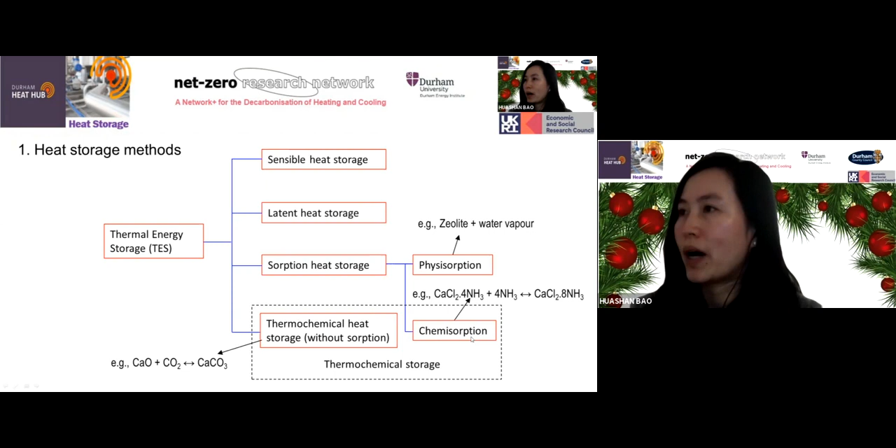So in this example, the size of the chemisorption storage is almost only 1/6 of the size of the hot water tank required. Actually, the salt adsorbent packing density can be further increased, in which case the system volume of the chemisorption storage can be further reduced.

The foundation of the chemisorption process is the interaction between adsorbent and adsorbate. When the adsorbate changes from the adsorbed phase to gas phase, that's endothermic desorption, an energy charging process. When the adsorbate comes into contact with the adsorbent from gas phase to the adsorbed state, that releases a lot of heat - that's exothermic adsorption, an energy discharging process.

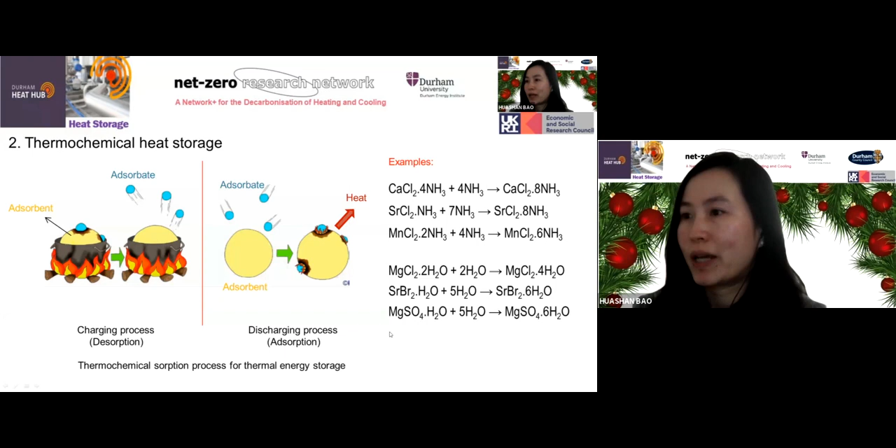That's energy charging and storage. When there's a need for refrigeration, once the valve is open again, evaporation happens spontaneously because of the temperature and pressure difference between the two vessels.

The liquid in the evaporator extracts heat from the surroundings and evaporates, then is absorbed by the SG bed, the adsorbent bed. In this instance, adsorption heat needs to be removed in time, but in some cases, if the temperature of the adsorbent heat is high enough, it can be used for space heating.

If there's a need for upgrading heat, the evaporator is supplied with low temperature heat, and the adsorption heat is generated at high temperature, high pressure in the adsorbent bed, which is the useful high temperature heat output.

A wide temperature range of heat output or cold output can be achieved by selecting the right salt adsorbent, and there are hundreds of options in terms of the salt adsorbent.

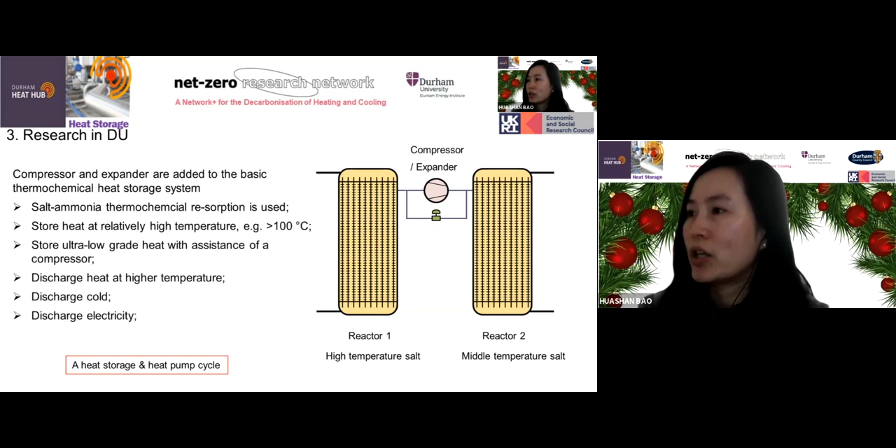In this hybrid cycle, for example, if we use a strontium chloride ammonia working pair, it runs like this: when the heat source temperature is high enough, let's say 110 degrees, it operates the normal sorption energy charging process, and the compressor is bypassed. When only ultra-low-grade heat is available, let's say 60 degrees, it also can be used to drive the desorption process.

However, at the same time, you will need help from the compressor to pressurize the desorbed ammonia so that adsorption can effectively take place in the adsorber.

In this case, the compressor can be powered by renewables like wind turbines or solar PV. So both the ultra-low-grade heat and electricity can be stored in the system for later use.

During the energy discharging process, it can upgrade heat, produce cold, or generate power. If ultra-low-grade heat, say 60 degrees again, is used to drive the chemical reaction in the desorber, ammonia gas is released and it will be absorbed by the adsorber at a higher temperature, like 110 degrees, or even higher if a different high temperature source is used in this adsorber.

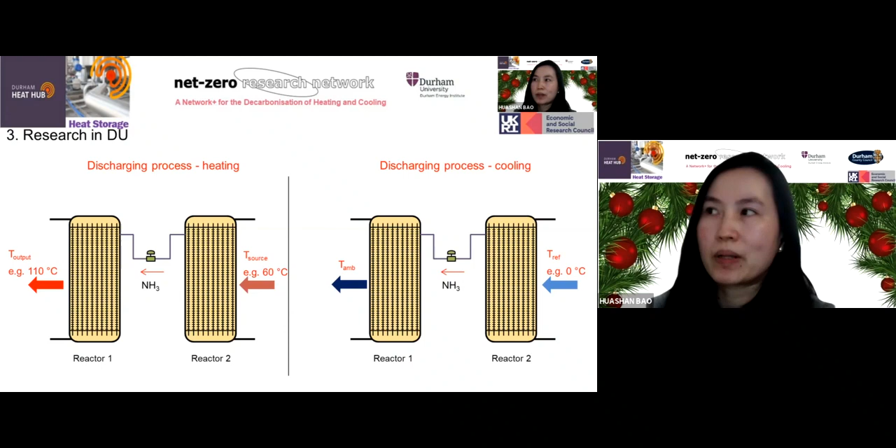If cooling is needed, simply connect two reactors together and the chemical reaction happens spontaneously, as explained earlier. If the ultra-low-grade heat is still used for desorption and makes the high temperature, high pressure ammonia pass through an expander turbine, then electric power can be generated.

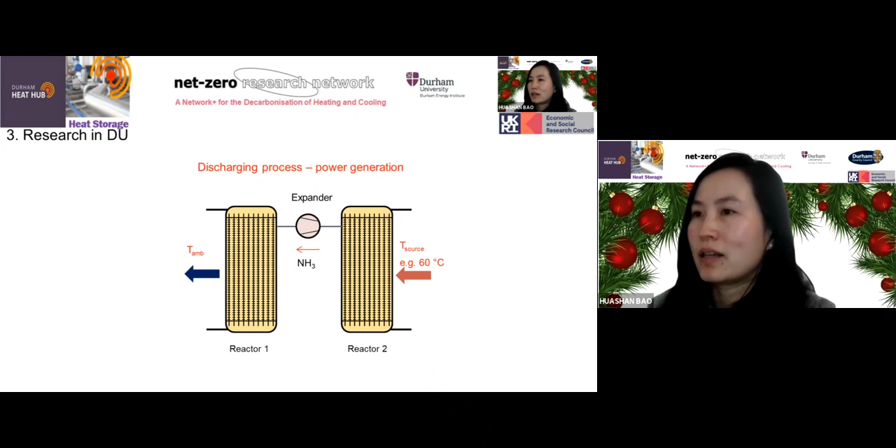If upgraded heat is preferred rather than power generation, the temperature lift can be around 25 degrees and 45 degrees for these two cycles respectively. The manganese chloride sodium bromide cycle has very low round-trip efficiency, but it can achieve around 75 degree temperature lift. The thermal efficiency of upgrading heat is around 0.3 to 0.5, and the thermal efficiency of refrigeration is around 0.6 to 0.75 for refrigeration at 0 degrees. More results, discussion, and detailed analysis can be found in our publications.

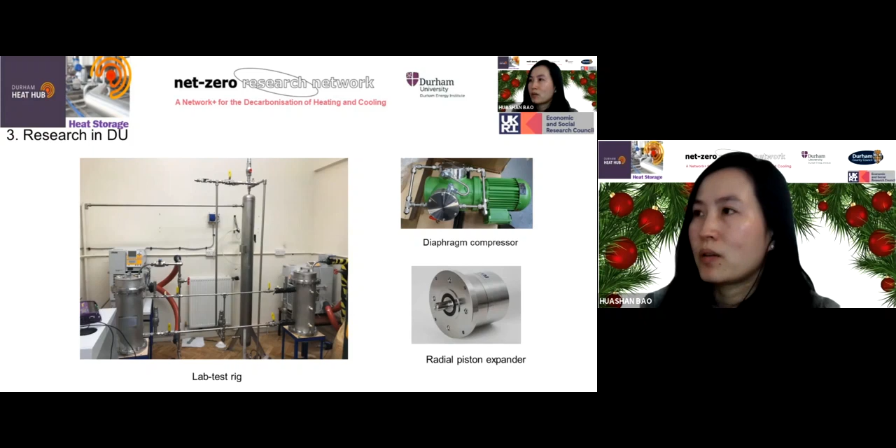This photo is our laboratory test rig for the thermochemical sorption storage system. We have a compressor expander in place to be installed later for comprehensive tests of the hybrid storage system. We also developed a commercial prototype through an Innovate UK project, which is being manufactured at the moment. That's basically what I would like to share with everyone today.

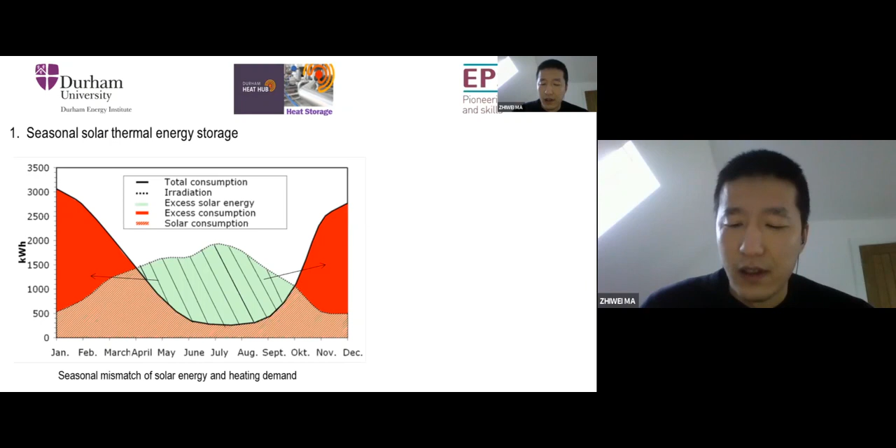I'll show you a table of how much useful heat you can get from a 20 square meter flat plate collector facing south on the roof, assuming a 50-degree inlet water temperature, enough for some heating. I list 8 cities across the UK, shown in the figure. We can have useful heat between 4,200 and 6,500 kilowatt hours. This is almost enough for a typical UK house with 100 square meter floor area and very good insulation.

So the key question is how we can do the storage for long term. Actually, technologies like sensible heat storage, latent heat storage, and thermochemical storage, as Huashan just mentioned, can all do long-term storage. So the key question is the energy density and the volume you need to store the heat - you don't want another house just to store the heat for your house.

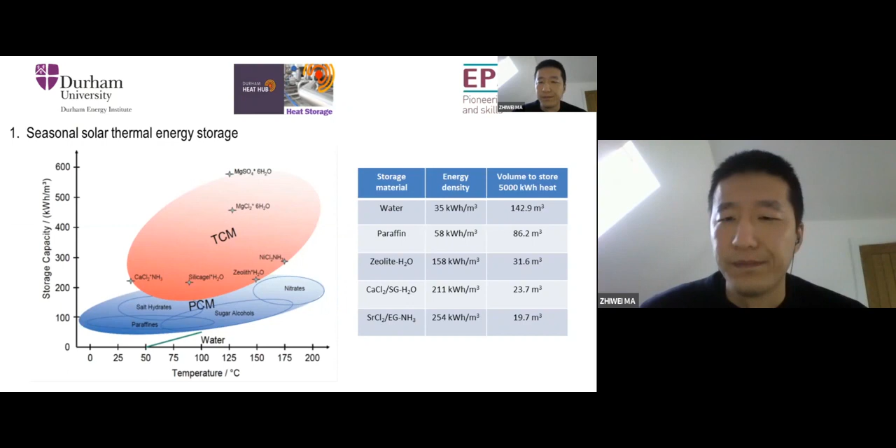And the minimum value we have here is strontium chloride and ammonia, which give you no more than 20 cubic meter storage volume. So that's solar thermal energy storage.

So in the second part is some pilot projects using water as storage material, which was delivered in Germany. I think it's 20 or 25 years ago. They started to do some pilot projects using this concept.

So you can see here in the picture, they built a giant tank with the volume of 5,700 cubic meter. That's one is in Munich in the year of 2007, coupling with 2,900 square meter solar collectors. And this system was served for 24,800 square meter heated area. So that's a kind of a central heating system using this solar collector and storage systems. Due to their calculation, this system can cover 47% of the heating of the whole year using solar heat.

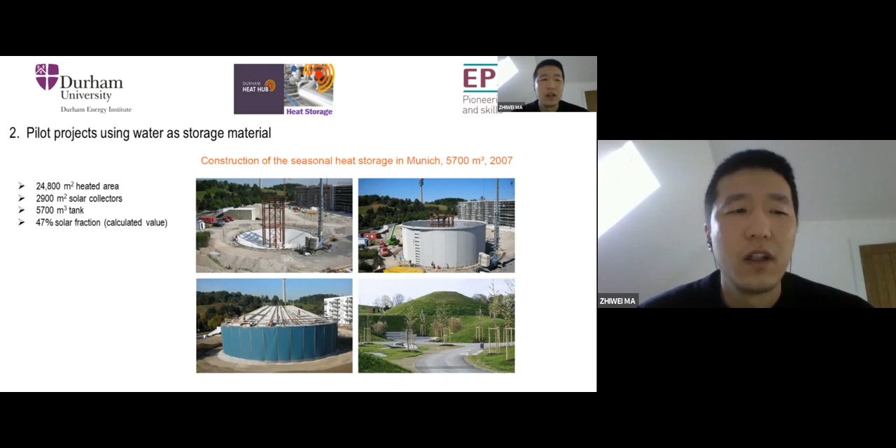Here is some summary of the different projects at different level, different storage volume, using different storage method, like above ground tank, underground pit, and underground borehole and aquifer. You can see the summary here.

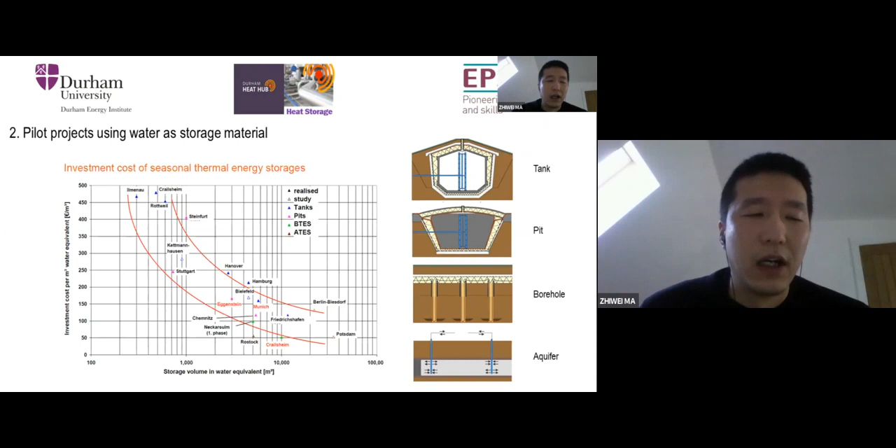This is the cost, the investment cost per cubic meter water storage. Of course, the specific cost reduced with increased volume. And for a 10,000 cubic meter storage volume, you can see the cost is around €100 per cubic meter water storage. That's the summary. I think it's 10 years ago. The cost may change now, but that's the only resource about investment cost I found.

So water sorption storage is a very hot topic in recent years because it has higher energy density and minimum heat loss during the storage, as Huashan just mentioned. So the water sorption actually has two different type systems, closed system and open system. The closed system, you can see here, that's the same configuration as Huashan just mentioned.

We have a reactor here and condenser evaporator here. During the charging process, you give heat to the reactor, and the salt or the sorbent material inside the reactor will desorb the water vapor and then be condensed here. During discharging process, it gives some ambient heat to the evaporator. So the water inside will be evaporated, become vapor, being adsorbed in the reactor, deliver some heating.

Actually, we can use an open system because there are water moisture in the air. So in the charging process, normally we use dry, hot air as the energy carrier, passing through that sorbent to desorb the water moisture from the sorbent, and the air become wet but warm air. That's the charging process. During the discharging process, we use cold but wet air penetrating through the sorbent bed, and water moisture in the air will be adsorbed by the sorbent and deliver some dry and warm air for the heating process.

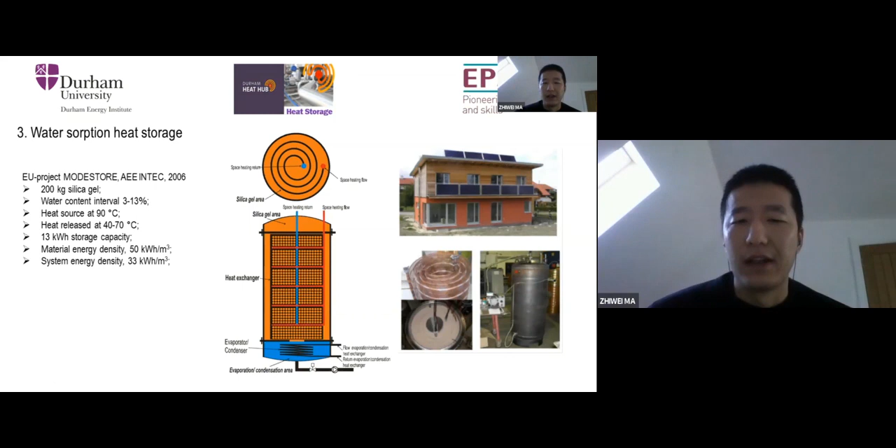Besides the physical sorption process, chemical sorption was also used for water sorption storage, like strontium bromide. In a 2014 example, they used 400 kilograms of strontium bromide. You can see the white salt packed in a tray, with different layers of trays allowing air to blow through the material layer by layer.

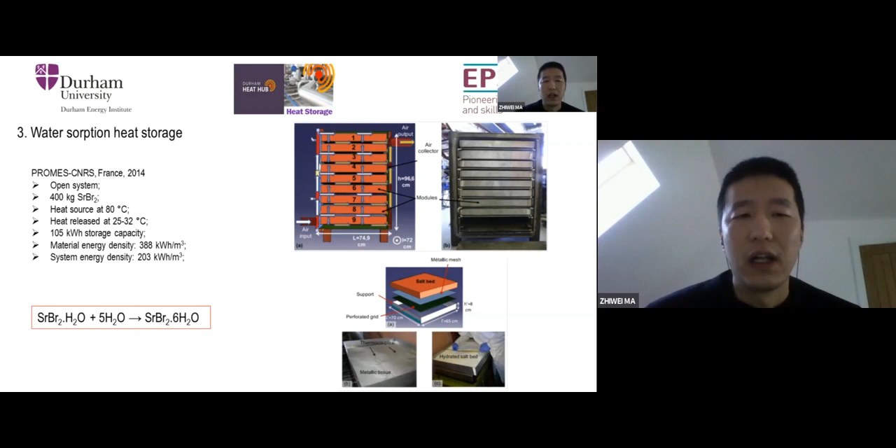So if you use this kind of technology, you need to couple it with some low temperature heating facility, like a fan coil or underfloor heating.

Here's a summary of this kind of water sorption heat storage technology. The horizontal coordinate is desorption temperature, and the vertical coordinate is energy density. You can see a lot of projects use zeolite because it has very stable performance, and the only drawback is that the desorption temperature is very high.

You can also use silica gel, which is cheap and has a desorption temperature of only 80 degrees, but the energy density is low. Chemical sorption materials like strontium bromide, magnesium chloride, and lithium chloride generally have higher energy density, but using salts has other issues - they are generally corrosive and cannot be used under high relative humidity, because the salt will absorb water moisture in the air and become liquid.

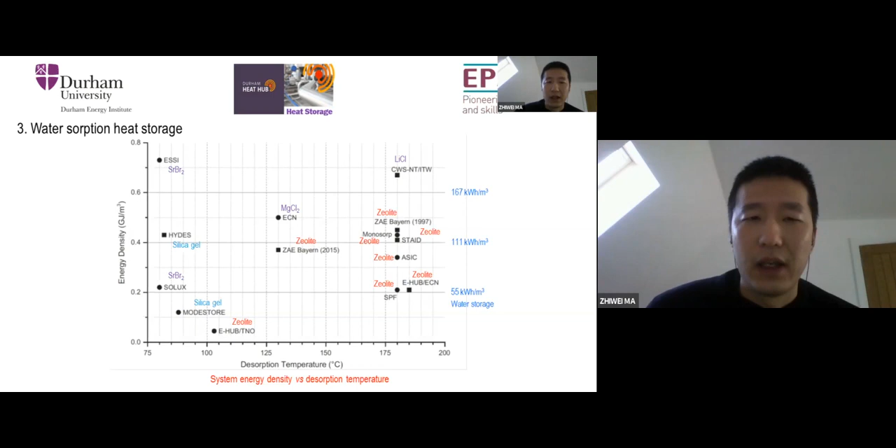So there have been some studies using composite materials to do water sorption. The last section I want to discuss is our group's study using a kind of salt hydrate, sodium acetate trihydrate, short name SAT, to do long-term storage.

SAT at room temperature is a white crystal salt like this. If you heat this salt to 80 degrees, it becomes a transparent liquid, just like water. This material has a very large supercooling degree, which means it needs very low temperature to freeze and get back to solid state. Although the phase change temperature is 58 degrees, it will not turn back to solid until, let's say, minus 10 degrees - that's because it has a very large supercooling degree.

So you can store this material at ambient condition without any insulation for long term. After seasonal storage, the temperature of this liquid drops to ambient temperature, say 5 degrees or 0 degrees, but it is still liquid.

So if you give some activation, like using a cold finger, seeding, or supersonic treatment, you can manually control the solidification process and activate it yourself. I'll show you a GIF here - you press this clicker inside the bag, and it will induce the freezing process. This process releases heat. That's the mechanism behind this storage process.

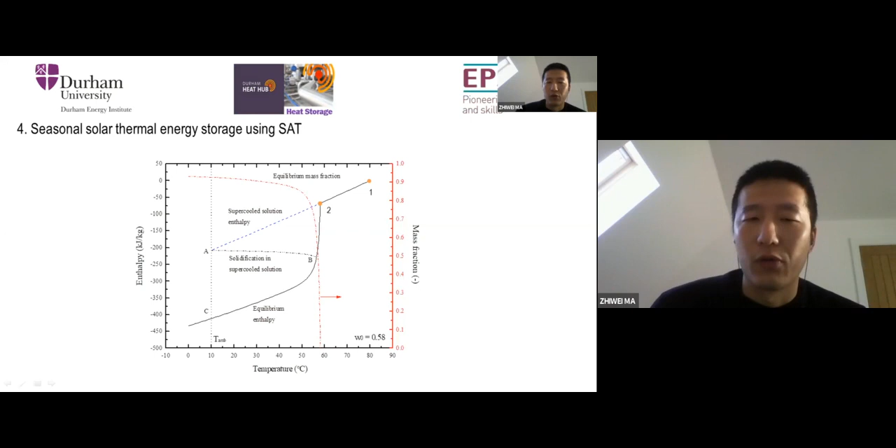So we built a model to simulate this process - a simple single tube model with material stored inside the tube and heat transfer fluid flowing outside the tube, with solidification starting from the top.

If you're using water as the storage material, you will have energy density around 70 kilowatt hours per cubic meter. But if you use SAT material at the end of storage with perfect insulation conditions, you will have 140 kilowatt hours per cubic meter storage density.

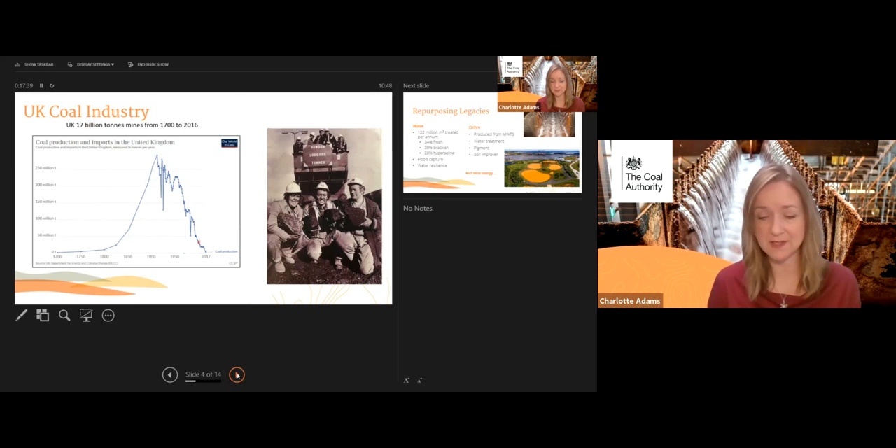Switching from steam to diesel and electric trains, cheaper imports of coal from other countries, the dash for gas - these things ultimately led to the decline of production. And then also you've got on top of that the decarbonisation agenda, with coal very much being phased out of our energy mix, as demonstrated in June when we had two months without coal generation, which was the longest time that had been achieved since 1882.

So we have this legacy of underground shafts and galleries. We have water coming out at surface that we treat, and we produce materials from the treatment of the water. So we're very much trying to repurpose the legacy. In terms of the water, the amount that we treat per annum is equivalent to the daily water demand for about 2 million people over the same period.

And the Environment Agency predict that there will be a shortfall in water within 25 years. So we're exploring whether some of the water that we produce could meet some of that demand.

As part of the treatment systems, you can see in the picture at the bottom, there's this orange coloration there. So that's effectively what's produced in our treatment systems. The biggest thing we deal with is iron, so we get it out of solution by oxidizing it in our treatment systems. And we also have a market for that - it's used as a soil improver and as a pigment.

And also it's very good at absorbing things, so it's used for water treatment as well. So we have markets for our ochre, and we're exploring markets for water. And also what I've talked about previously in some of these meetings, mine energy is something we're looking at.

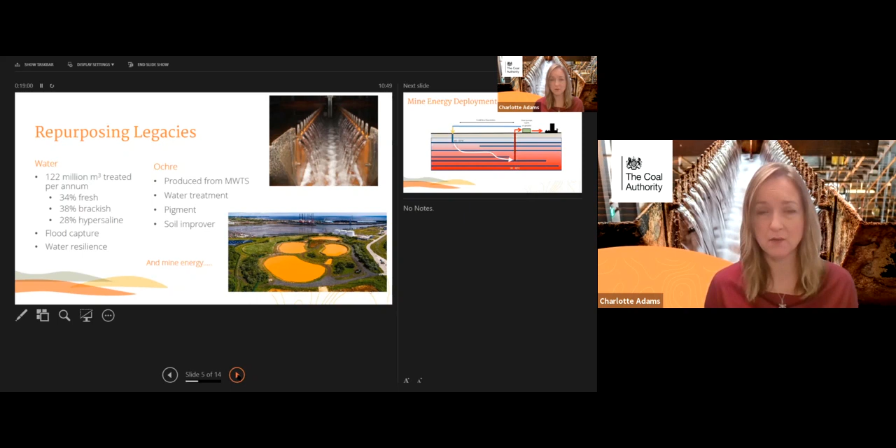Obviously today we're going to be more focused on the storage. So just a brief background of what we are doing with the mine energy. We estimate that there's enough heat in the coal field to heat all of the buildings that overlie it. And the reason that it's attractive to us is obviously we have access to it through the infrastructure that we own.

But we think it's a good source of heat because we don't have any seasonal variation in the source temperature. So if you've got a heat pump system running on a mine energy system, your coefficient of performance will stay constant, unlike an air source heat pump or a surface water source heat pump, where the COP tends to drop when you need the heat most.

And if you compare this to open loop aquifer heat pump systems, which again are similar in that they have a constant source temperature like the mine energy does, the reason mine energy has benefits over that type of system is because the structures that we target underground are large open structures capable of flowing much greater quantities of water. It means you can get away with fewer boreholes to access it.

And we also, because we tend to take the water from one seam and put it back in another, we find that the boreholes can be quite close together on surface sometimes, so that's quite good if you've got a constrained site. And this diagram is a simplification of how it all works in practice.

If we were doing a larger, maybe 2 or 3+ megawatt size scheme, we'd probably have a couple of boreholes for abstracting the water and one for re-injecting it, just to give you a bit more flexibility and resilience on the system. So in terms of storage, we're thinking about the bigger systems.

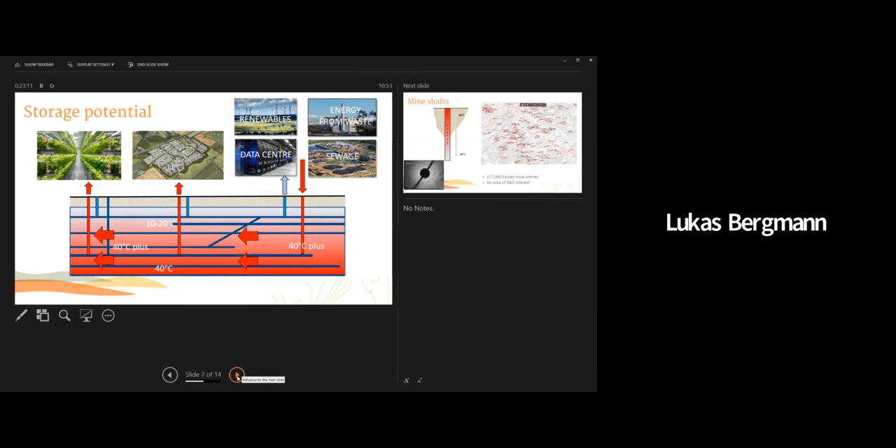And the type of structures that we're looking at, we're looking at both mine shafts and the underground workings as separate opportunities in which we could store heat.

But the thing about them is very often, as part of the colliery abandonment, they're very often filled. So they're not all accessible. So one thing we look at if we're looking at a new site is we look for the shafts, and we've got a database to see whether the shafts are usable or not, because obviously that can save you some drilling costs if you're thinking of a mine energy system, and also for storage, then we need a shaft that's got a good volume of water that we can use to reject heat to.

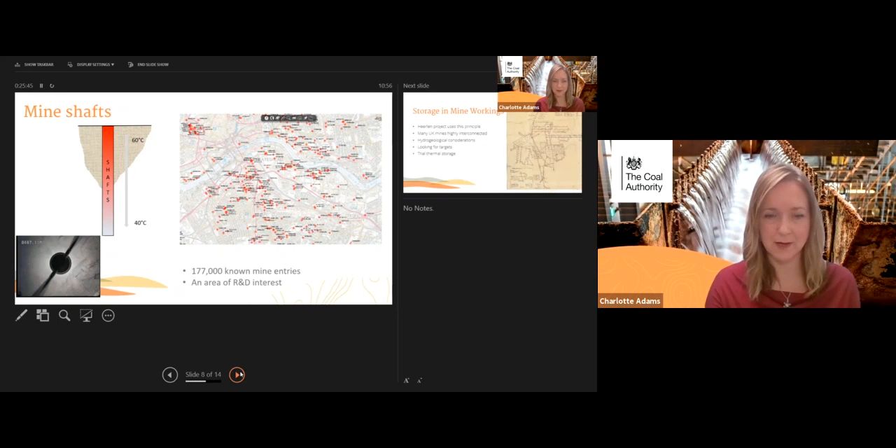A good example of this is the Heerlen project in the Southern Netherlands. There they have a heat network based on the 5G concept, an ambient loop heat network, based on energy exchange. So there's heating and cooling being provided to the buildings there. The idea is there's not massive changes in temperature difference, but in that instance the whole mine is effectively used as a thermal store.

It's quite deep, around 700 meters, and it sits at about 28 degrees. The thing with that is it's not connected extensively to other collieries, so it's effectively a thermal store. That said, the project has been running for about 10 years and has been successful, and they've now got to the point where they need to put other sources in because more loads want to connect to it.

So the Heerlen project is a great example, a little bit different to many of ours, because our mines in the UK are very well connected. That was done so you could control water levels regionally and also access coal over wide areas, so we have a lot of very well connected collieries. We need to look at where we've got these discrete pockets, maybe in smaller collieries, that could be suitable and also align with the location of the heat source we want to put into them.

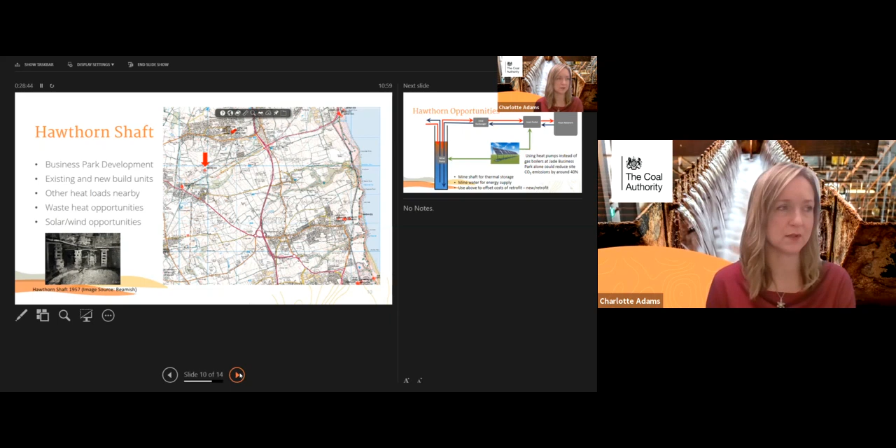So the opportunity here: we've got a shaft that's just under 8 meters in diameter with a 357 meter water column in it, which we've worked out offers a storage opportunity of around 17,500 cubic meters. That's already stratified because this one isn't pumped.

The water here is around 100 meters below surface, because we keep the water levels lower to protect an overlying aquifer. So we need to think about the electricity consumption in lifting water out of the shaft once we've got heated water in there that we might want to use.

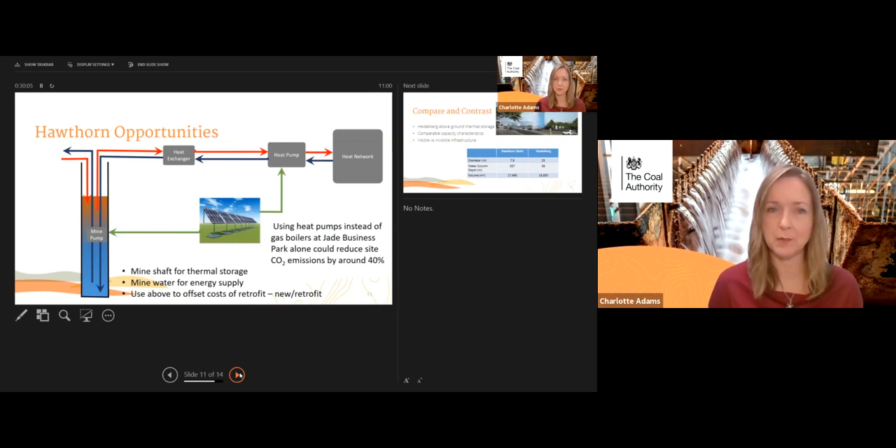But there's an opportunity also to offset that by having some renewables on site. So it could be a very low carbon opportunity here at Hawthorn.

I just thought I'd put that into context with an above ground thermal storage system. This is an example I found in Heidelberg, a large capacity above ground thermal flask effectively. The Hawthorn shaft is a similar kind of structure, but obviously below ground.

We've heard from consultants involved with heat networks that above ground thermal storage systems, because there's a limit on the height they can be, are often wider than you'd want just to get the capacity, and that isn't quite as good thermodynamically for stratification and thermal performance. The way shafts are configured, being slender and taller, makes them really good for storage of heat because you can get that stratification in there.

So it's a comparable size, obviously one being above ground, one below ground. The Heidelberg project was estimated at around 9 million.

You've also got things like fewer planning and visual acceptance issues if you're using something underground. And we've got to think about the impacts of the ground as an insulator as well - how well the below ground system performs thermally compared to the above ground one. We feel having that insulating effect of the rock around it would be a very positive thing.

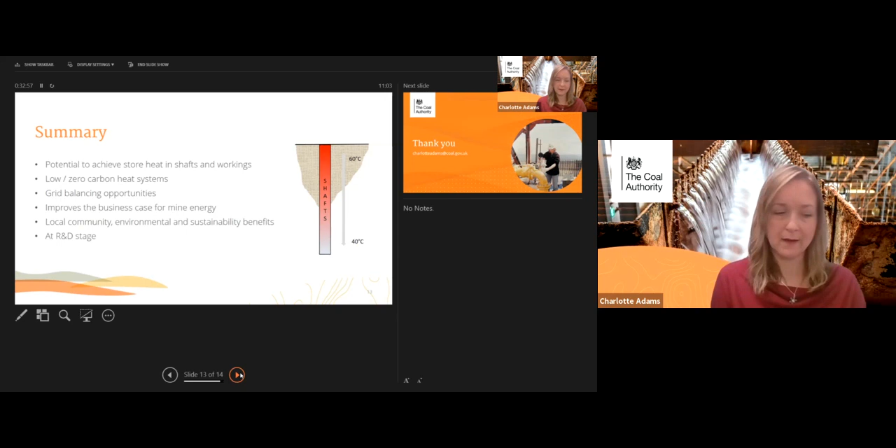So that's everything from me on that. Thank you very much for listening, and happy to take questions in the chat or at the end.

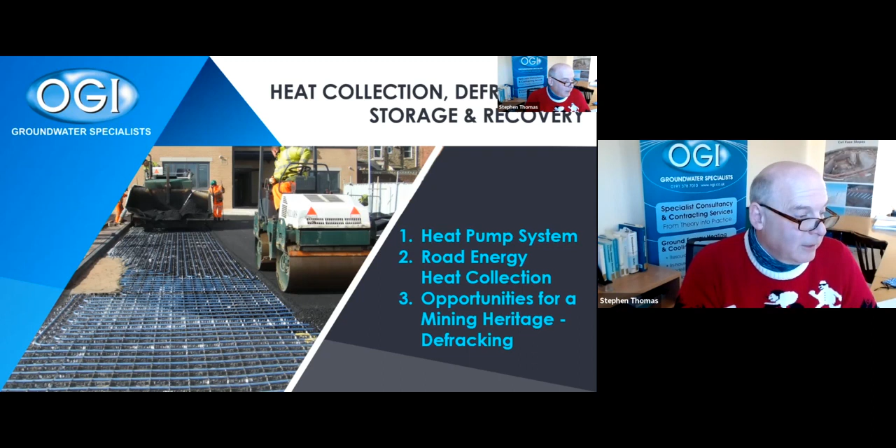What I'm doing is working backwards. If you're going to lower the carbon footprint, you start off with underfloor heating with smaller spacing than you would normally have with a standard system. So here we had about 200 to 300 millimeter spacing between the coils, which means we only keep the temperature in our pipes at 30 degrees. So if you're abstracting heat at 0 from the ground, that's only a 30-degree lift, and I'll explain that later.

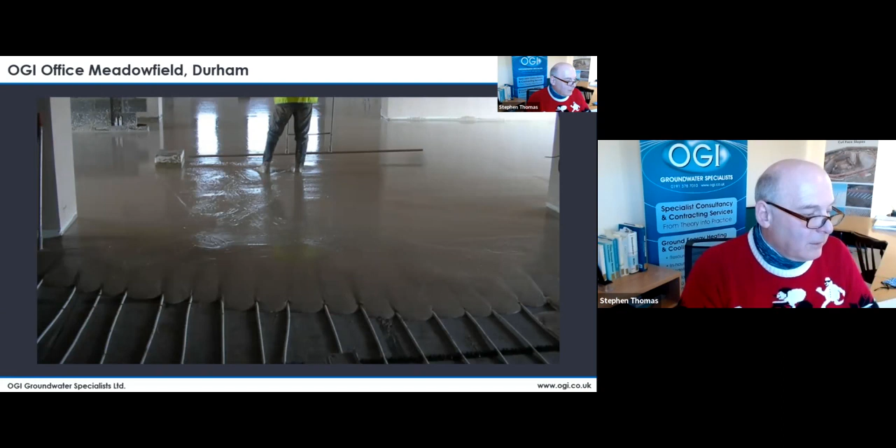This is Dr. Richardson, probably the most overqualified plumber you can consider. Then the pipes are screeded, and that's the floor.

Heat pump, for those not familiar, you have two separate pumping systems. You have the primary pump, which pumps the glycol around your collector pipes, in our case here, out the back, which I'm looking at right now to the window. You pump out at a temperature, bring it in about 4 or 5 degrees higher, and that flow rate times the temperature times the volumetric heat capacity gives you the energy to the building.

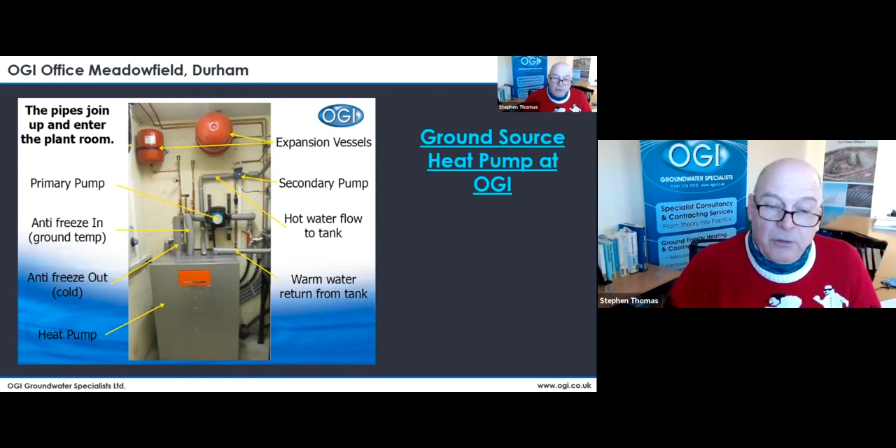It runs through the heat pump, electricity provides power to the heat pump, then it outputs on the secondary pump the hotter water that runs to your buffer tank, and the buffer tank feeds your underfloor heating. So in principle, your building uses the heat, abstracts heat from the heat pump, sends cold water into the ground, that ground via conduction absorbs heat, and warmer water, maybe 4, 5, 6 degrees, goes to the building.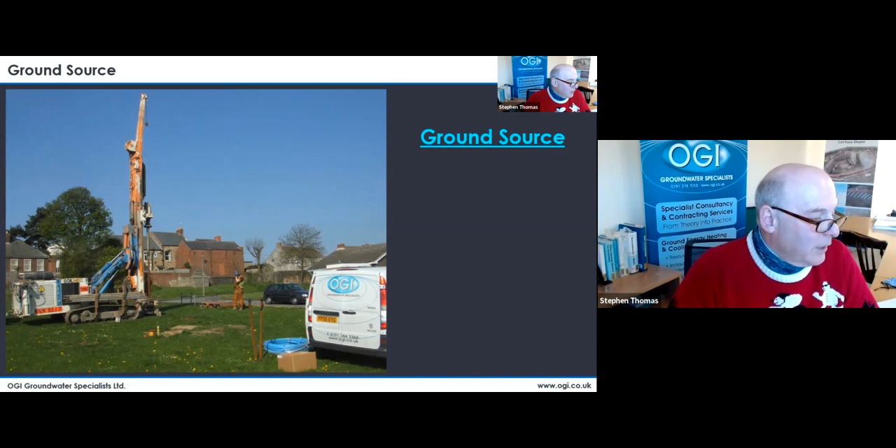Okay, now there's how you collect the water, the heat from outside. This is a project we undertook the design and construction of, 100-meter boreholes. You take the borehole and put in a number of collection pipes.

Now these are closed loop pipes. In this case we had a double loop system, so 2 loops. Again, the design of the loops, you can get more efficient if you run 2 sets of loops through a borehole. Then you put a tremie pipe and you grout it.

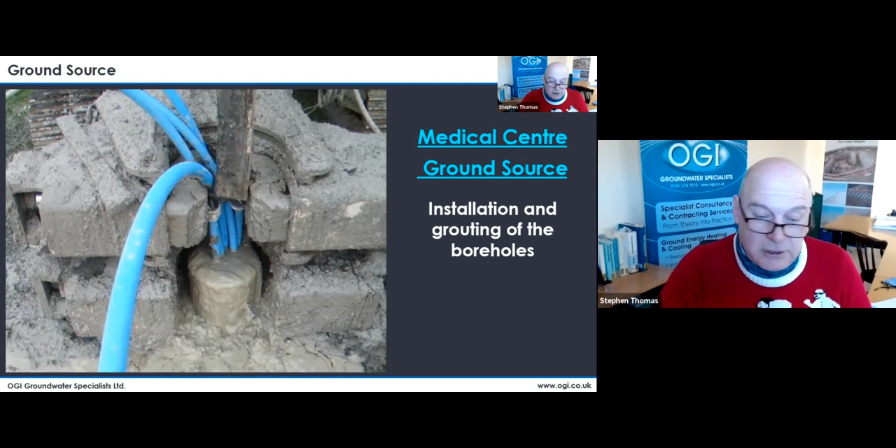I'll talk about the grouting later because this is critical to an opportunity for the northeast. Basically, you put a tremie pipe into the bottom and put in a mixture of bentonite, high conductivity bentonite, to absorb the heat. Then you connect the top of the boreholes to the horizontal heat transfer pipes.

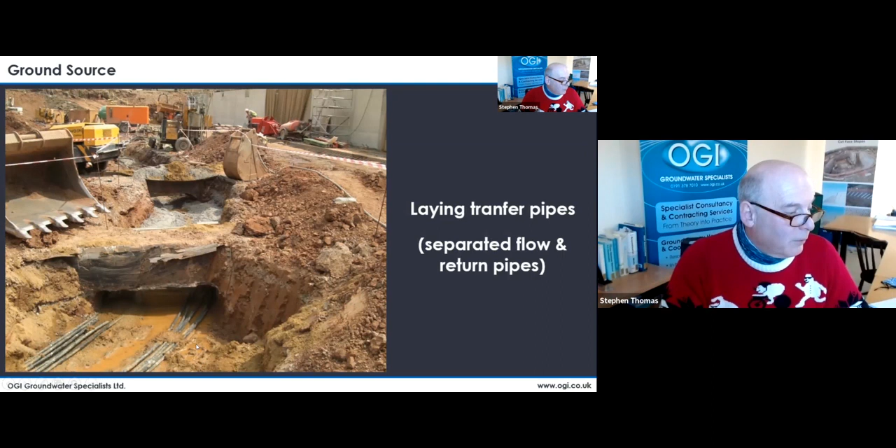This one is particularly in Leicester. You have a flow and return to each borehole. Then you can see the collector pipes. You keep them separate to make sure the heat doesn't connect, so they'll be flow and return pipes. They're separated. Finally, they come to a manifold where it's collected.

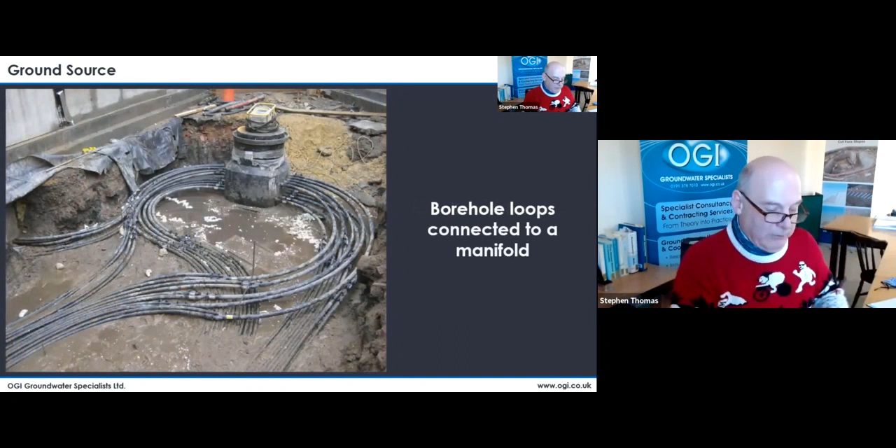And that manifold you can access from ground level. There are the connections to the manifold, and the valves inside the manifold. And it goes, you can see it, to the top of that, that's the large flow and return to the building.

Or you can have the manifold inside the building. This past one was in Stanley, Durham. This was in Leicester. And then you get your heat field.

And then you design it so it's sustainable and it feeds the building. So the basic mathematics are that you have energy from the ground, which is, if you like, free. You've got input electrical energy, and then you've got your energy to the building. So the combined energy from the ground plus electrical energy gives you energy to the building. And the ratio of energy to the building divided by electrical energy is your COP, which Charlotte mentioned.

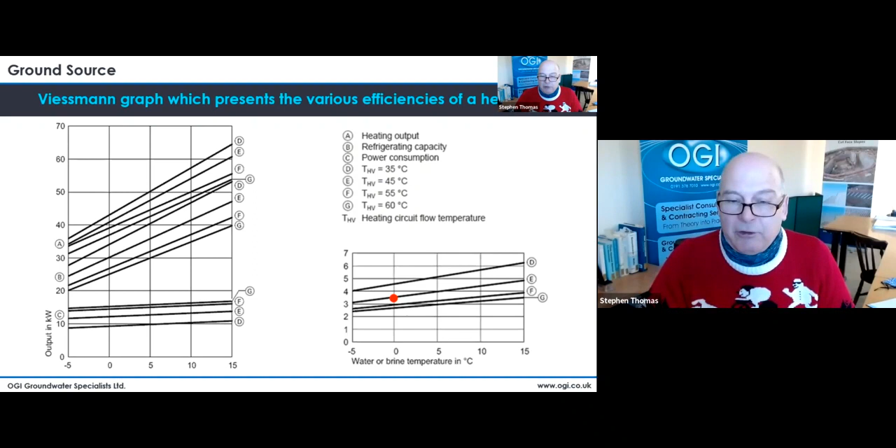So our heat pump is a Viessmann, and this is from their website, from their charts. Basically, as a standard, they say if your brine or glycol temperature comes in at 0 degrees and you're outputting at 45 degrees, you can expect a COP of 3.5, which is about 25 to 30% from electricity, 70 to 75% from the ground.

So if you're using X number of kilowatt hours, you have to provide 25, 30% from electricity. So it's a good multiplier, but not fantastic.

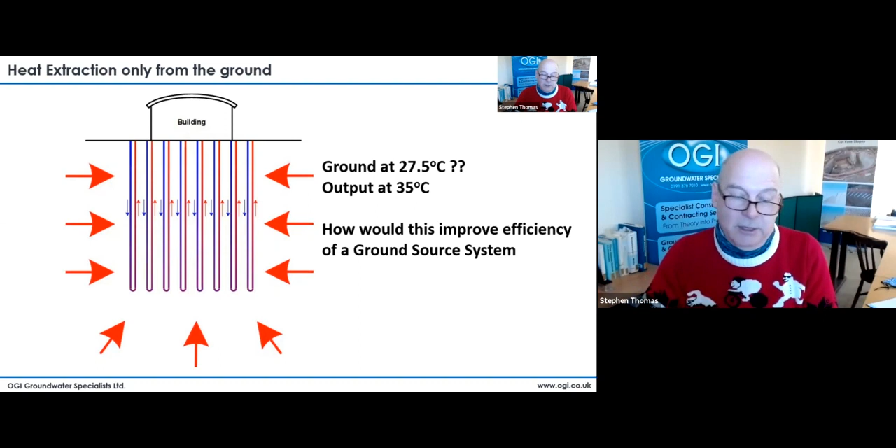So the question I have here for this seminar is what if you preheated that ground to somewhere between 25 and 30 degrees, which we have done in practice on our projects. And then you design your internal system so you've only got to output at 35 degrees with close spacing for heating. How would this improve the efficiency of the system?

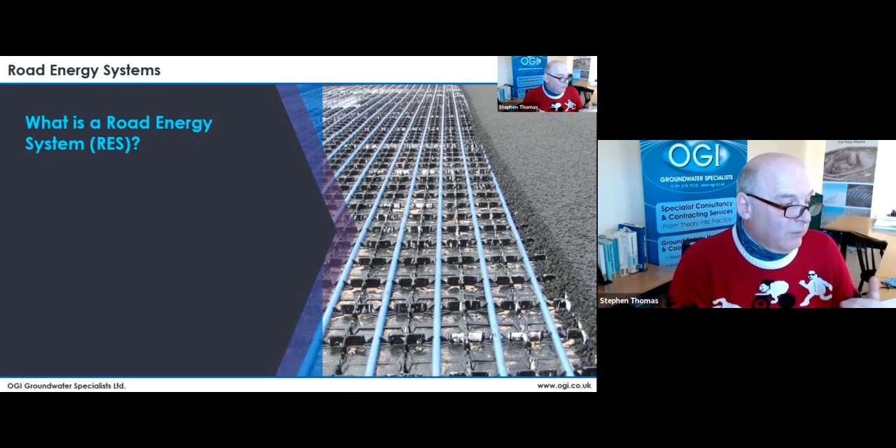Right, next stage is one method that you can consider for collecting very inexpensive heat. So we've applied at one of our sites what's called a road energy system. And in a sense, it's the opposite of underfloor heating. You put more hard-wearing pipes in racking and you surround it with asphalt.

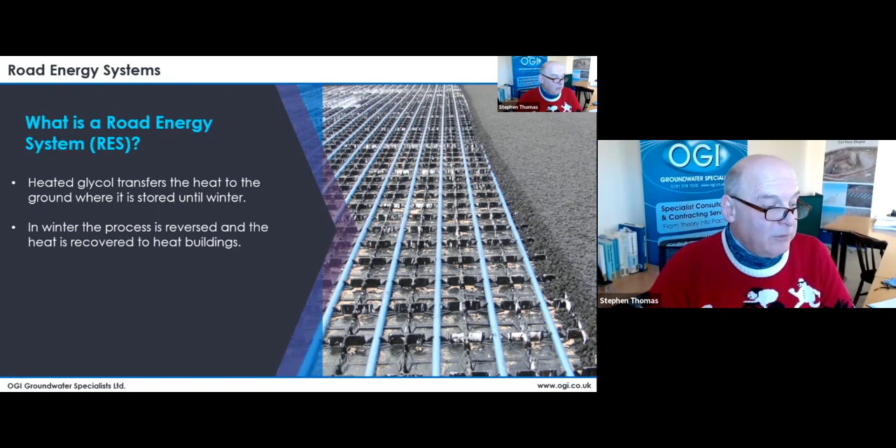That asphalt then attracts vast quantities of heat over the year, not just in summer, but in winter too. We've calculated in the order of 200 kilowatt hours per square meter per annum, which, when you've got to build a road anyway, that's a massive amount of heat that's available, which is currently just going to waste.

So the principle is you use the same ground loops, you collect the road energy, but via a separate loop system. It goes through a heat exchanger and then you dump that heat into the ground. We have measured increase in the ground in the northeast between 25 and 30 degrees, which means that if you need the temperature in your building at 35 degrees, you're only uplifting the temperature between 5 to 10 degrees. So it takes very little electricity to boost that up.

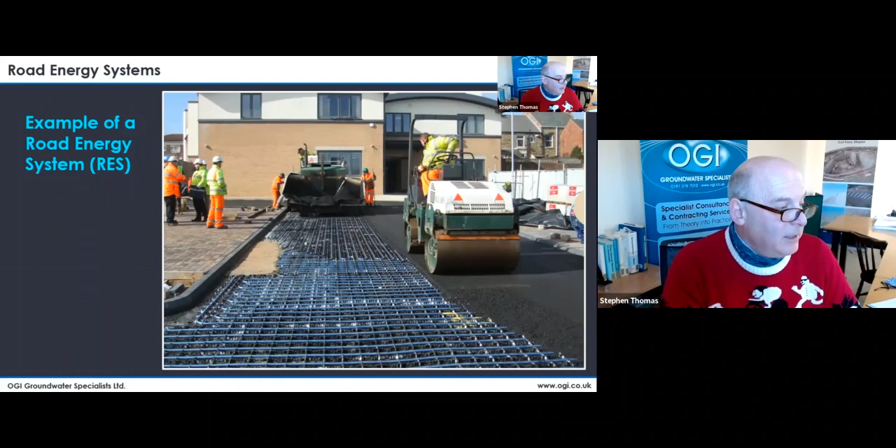So as an example, road energy systems here, you can see it being laid. There's another example of what we call a hot deck system. You can either put it in racking or you can put it down with this system, but the principle is the same. You put the pipes in the main asphalt. You keep the wearing course above it, so that can be replaced as normal.

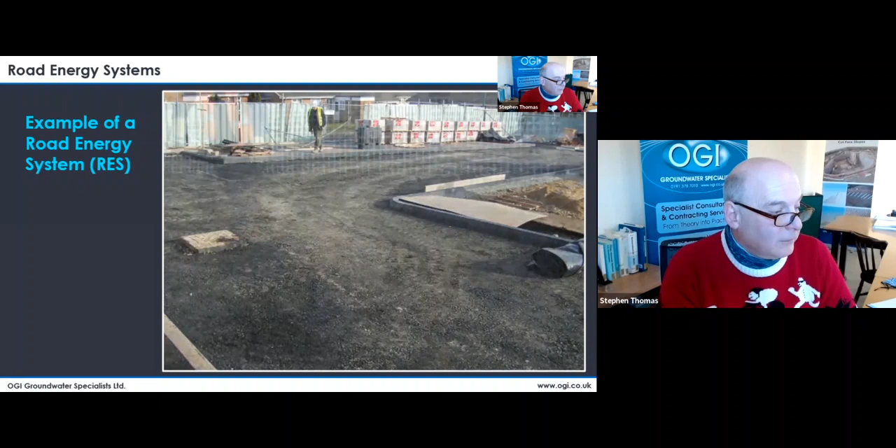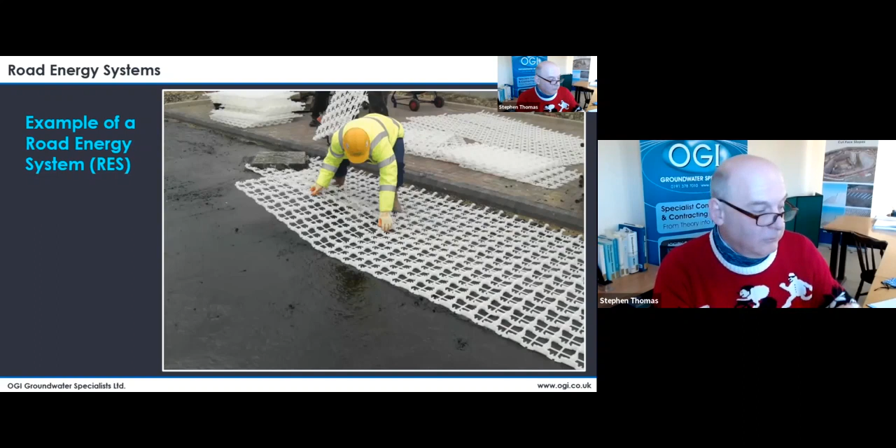The installation is very simple. You whack down the type 1 material on the surface. You put a base course on. You then spray it with what's called a tack coat, and then you lay in the racking, shown in the background. This took place in one day for laying this top surface.

You lay it down over the site, like so. Spray it again, and then it's a two-man job to put in the pipe work. This all goes to, again, another manifold, an external manifold, and then finally it's finished. There's your car park, and you wouldn't know anything's there.

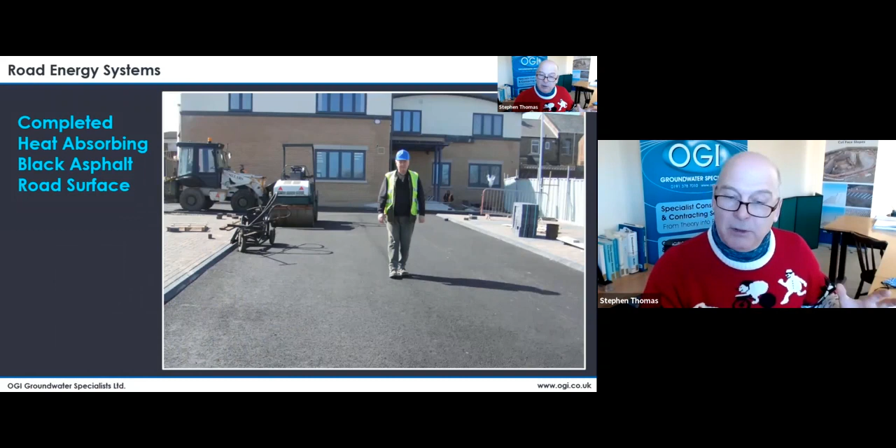But that little car park effectively provides 80% of the heat to the building. But as one of the earlier speakers mentioned, the main heat you get is from the summer, spring, and autumn months, but you need it in the winter. That is collected through a heat exchanger and then pushed into the ground, and this stays relatively local. So this would be the standard.

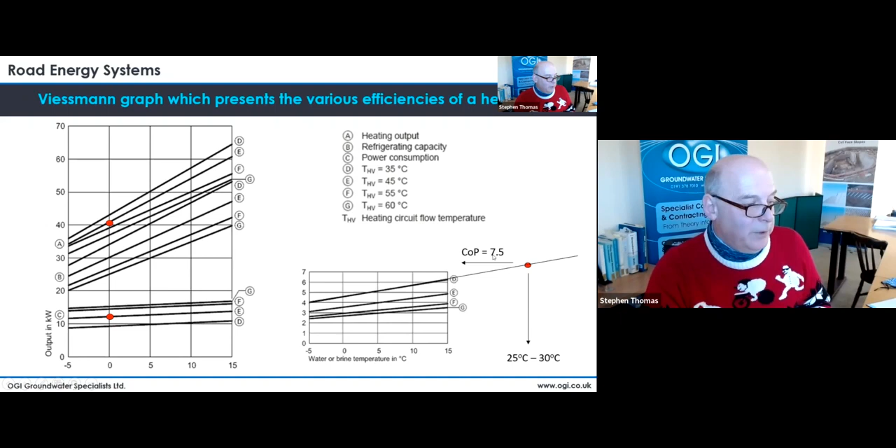But when you extend these graphs, you can see that you can increase, which we measured. That COP is 7.5, which means in practice you only need 13% from electricity and 87% from the ground. So that more than halves the electricity demand. And again, if that electricity is from solar panel or wind turbine, then you have a zero carbon usage.

That's the principle. Very simple abstraction of heat from the road, but it could also be from waste heat from refrigeration units, for example, in a Tesco's. There's an enormous amount of waste heat. We've captured heat from solar panels that have to vent because they're too hot. There is a vast quantity of waste heat, up to 25, 30 degrees, that can be dumped in the ground, and the ground is very absorbent, will absorb it very easily.

Finally, what are the particular opportunities for a mining heritage such as Durham? Well, this is why I wanted to build on Charlotte's talk, in that we've had experience of putting closed loop boreholes in a mining environment. Most of them are very challenging. The first one, we occasionally go into mines and we have to block them up.

But you saw us putting the boreholes in with the grout. We delivered - I calculated the grout requirement for a 20 borehole system, sent it to site. And at the end of the day, my operator rang me back and said, that first borehole was brilliant, when's the rest of the grout coming? What had happened is that we hadn't hit the mine, but we stopped 20 meters short.

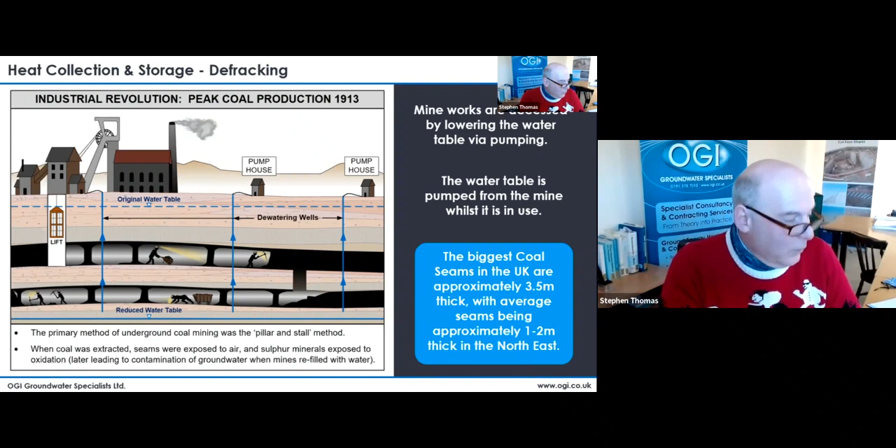But what we discovered is that the abandoned mines, many collapsed, and the ground above the mines, maybe for 100, 150 meters, were like an accordion expanding, and it effectively fractured, producing numerous horizontal fractures. And of course, our grout had disappeared into one of these fractures and was lost.

But later on, we found out that it was an incredibly efficient borehole, producing about 4 or 5 times more heat than a standard borehole. This is because the high conductivity grout had fingered its way out. So whilst our borehole drilling was only 300 millimeters, it was effectively like having a 3-meter borehole for heat collection.

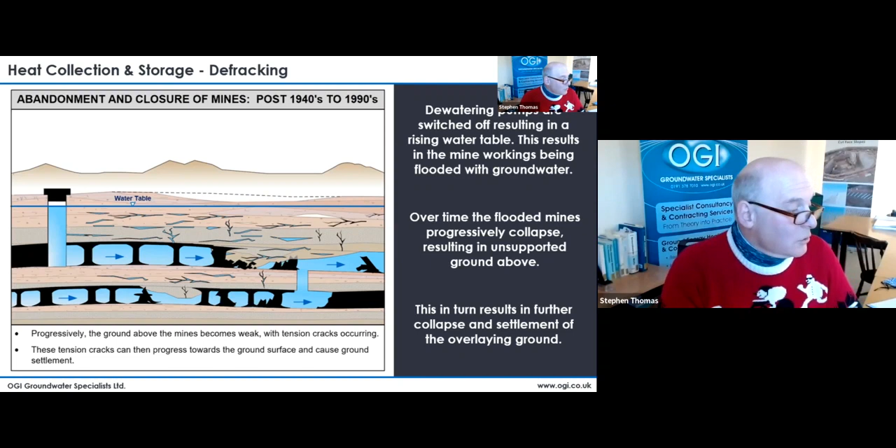We call this process defracking, because we are not only making use of those fractures to bring the heat in, but the grouting process stabilizes the ground as well. So this is the concept for the mines. Our process is that we drill, but not into the mines, above the mines.

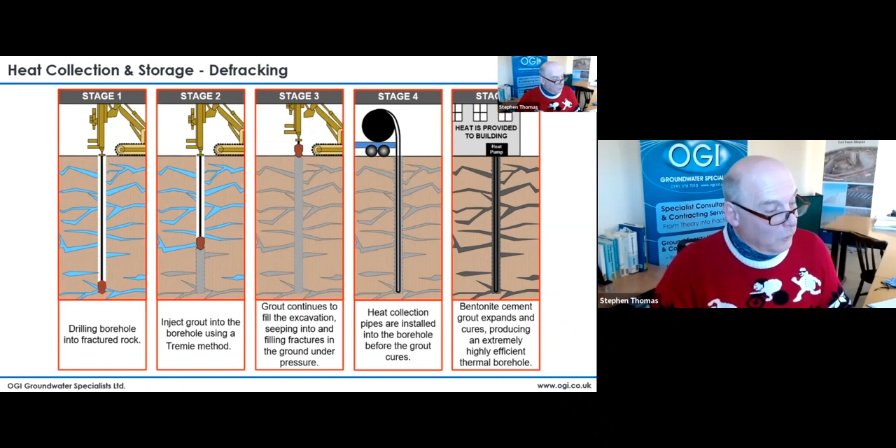So our vision for this is a system whereby you can combine houses, road energy, collection pipes, but the individual has a heat pump, with an independent supply of charged glycol. That can be done by a third party, and that works very efficiently, leaving you with a community which feeds off the mine heritage.

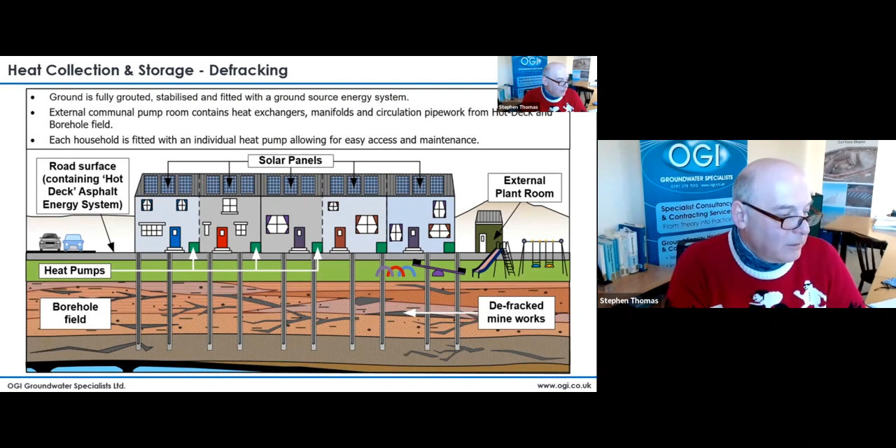Thank you. Two local projects, excellent projects - Primary Care Centre Stanley, which we did, and Lanchester Road Hospital - are 2 examples where we used this defracking technique.

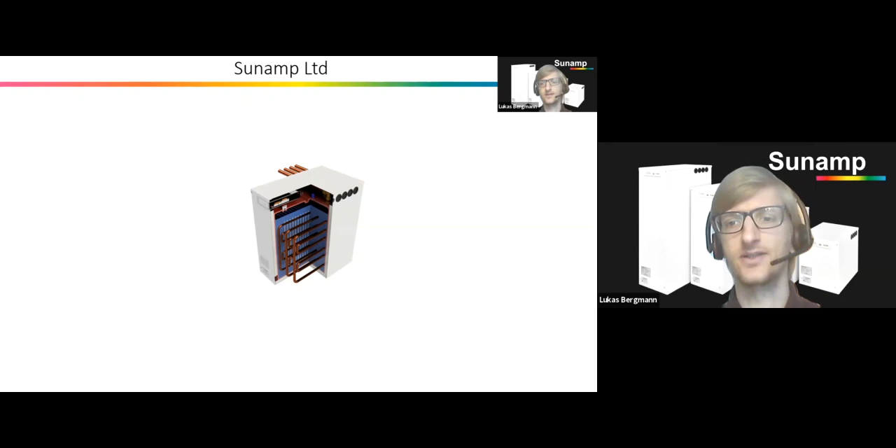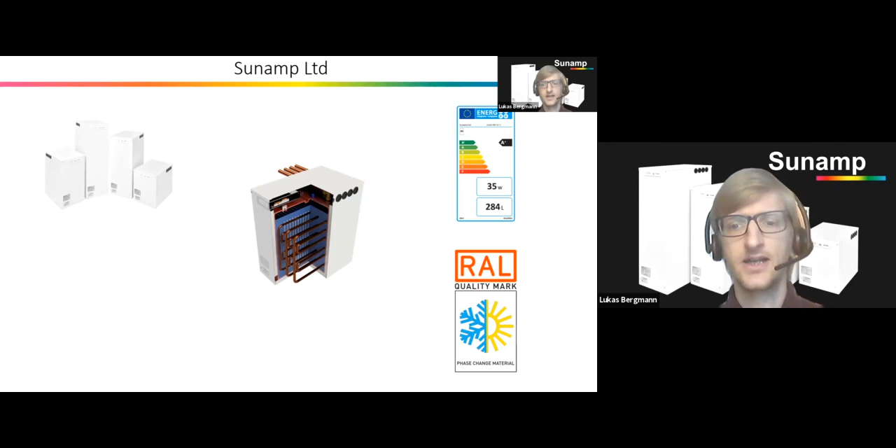Before I start with the main part of my presentation, just a few words about Sunamp itself. Sunamp is a company founded in 2006, and we produce heat batteries to store both heat and cold energy. Our heat batteries are available in a range of different sizes, from residential to commercial and industrial scale. They have outstanding thermal performance and very good insulation levels, and outstanding material performance of the material inside the heat batteries, which I will come to a little bit later. Most importantly, they are the most compact thermal storage on the market today.

Now, what that looks like you can see on this picture here, which is from our experience room. On the left-hand side, you see a standard 210-liter unvented cylinder, as they are being sold today in the UK. On the right-hand side, you see our heat battery, a Uniq 9, that delivers an equivalent amount of hot water to the building, but in roughly a third to a quarter of the space.

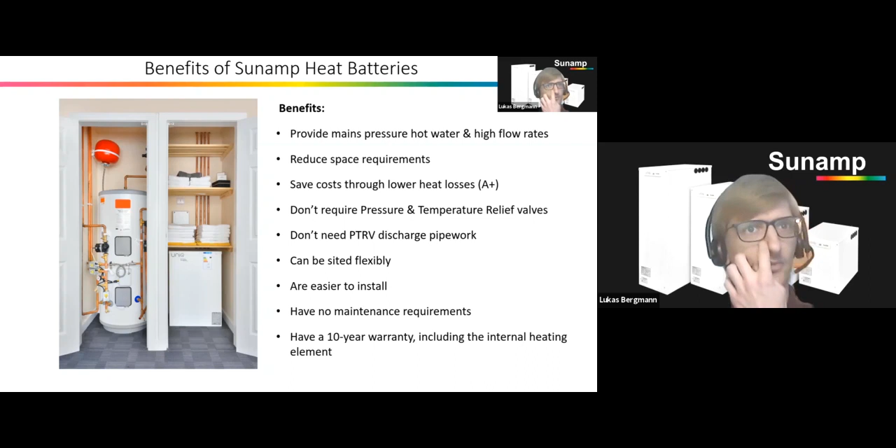The benefits of heat batteries are not only that they provide mains pressure hot water and high flow rates and reduce space requirements, but they also save costs through lower heat losses, don't require pressure and temperature relief valves - for those of you from the installer and plumbing trade, that will probably mean something - and you also don't need the associated discharge pipe work. They can be sited very flexibly because of that, are easier to install, and have no maintenance requirement, and have a 10-year warranty, including on the internal heating element, which is unique in the market.

In terms of the agenda of my presentation, I want to first talk a little bit about what a PCM heat battery actually is. I'm going to make a very brief excursion into what PCMs are, mainly because we've heard about that already quite a lot in the first two presentations. And then I will talk about why they will become a key part of the energy transition in the UK towards a decarbonized heating system.

So, what is a heat battery? There are several definitions of this out there. Our definition of a heat battery is that they are thermal stores storing energy from various sources and providing it as useful heat or cold energy using phase change materials.

So if we look at this in a little bit more detail and deconstruct the content, first of all, heat batteries are thermal stores. What that means is that they do not store the medium that you actually want to use the heat in. So they do not store potable water or system water that is to be circulated through the heating system or comes out of your tap or your showers. They use another material to store the energy that is required to heat the actual distribution medium.

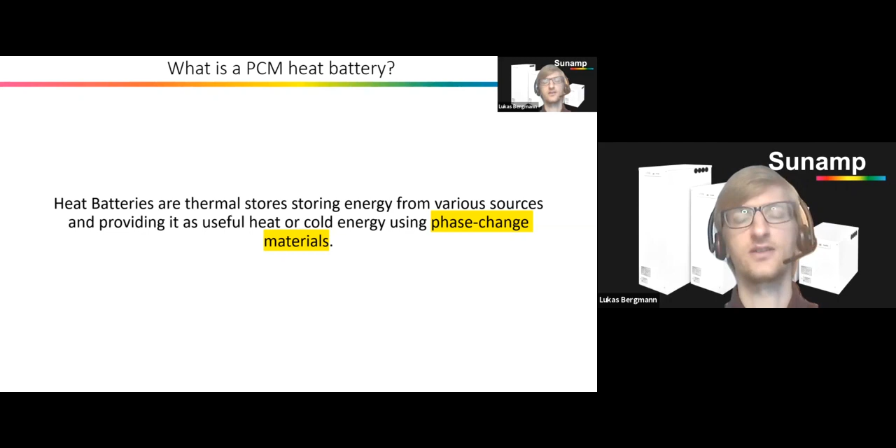And last but not least, our heat batteries use phase change materials. We've already heard quite a bit this morning about the use of phase change materials and their benefits, and I just want to very briefly recap that.

So our heat batteries use latent heat from the transition of a material from its solid to its liquid state. Probably the most well-known example of that, that everybody has come across already, is water. Water at a temperature of 0 degrees changes from its liquid to its solid state and vice versa, depending on whether temperatures, or whether energy, is taken out or put into the system.

Now, the important and interesting point is that the amount of energy required to turn 1 kilogram of ice into 1 kilogram of water is the same amount of energy that is required to heat that kilogram of water from 0.1 degrees to a temperature of 80 degrees Celsius. So as you can see, in that process of turning from a solid to a liquid, there's an enormous amount of energy stored in this case. But obviously, for water, this is not at a temperature that is useful to us when what we want to do is provide space heating.

At Sunamp, we use a different material that's already been mentioned today in the second presentation. We use a material that is well known from these little hand warmer systems. I've got one here. It's sodium acetate trihydrate, SAT, and we have made several changes to the formulation to make it suitable for use in space heating and hot water applications. Sodium acetate trihydrate provides about a fourfold increase in terms of energy density, which means that the products using it can be about four times smaller—in reality, a little bit less than four times smaller than hot water tanks.

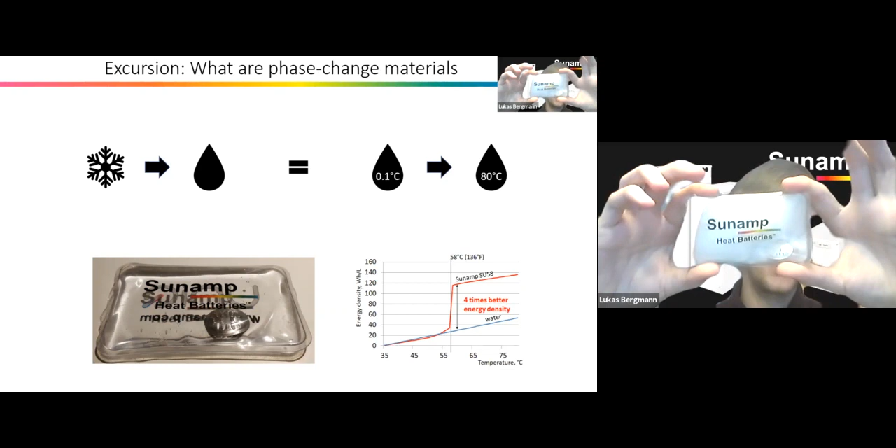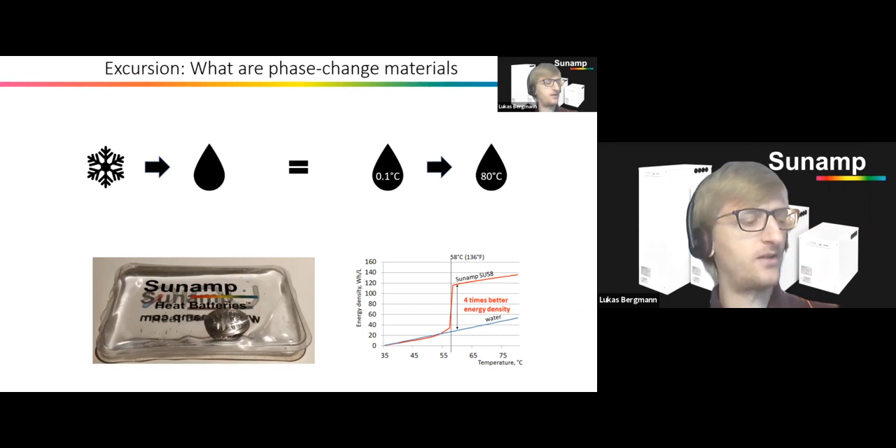Sodium acetate trihydrate, I will just show you—as you can see, it's now freezing. And unfortunately, laptop cameras are not thermal imaging cameras, so I can't show you that. This is now at a very nice temperature that will keep my hands warm and could deliver me hot water for showering and other purposes.

Now, one thing that is important to mention when it comes to phase change materials and latent heat is that this is not at all a new concept. In reality, the discovery of latent heat goes back to Joseph Black, who discovered this while still a professor at the University of Glasgow back in the 18th century. He discovered the fact that the temperature in an ice-water mixture does not change, while the temperature in a cold water mixture does change over time.

Unfortunately, and this is one of the main reasons why phase change materials have not been in use successfully until recently, after the third year of operation, the phase change material that she was using started to separate and lose its phase change material properties.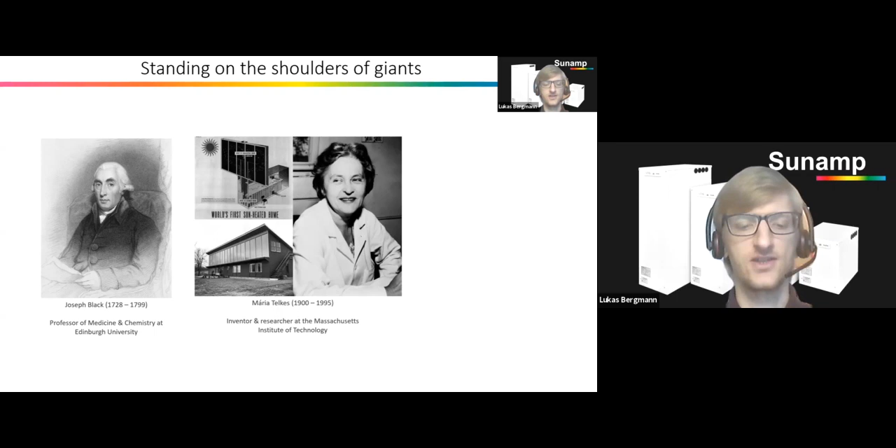So what Sunamp has done is that we have been working very hard since 2006, since the foundation, for about 7 years, mainly on researching phase change materials and developing a solution to the stability of the product. We have achieved the only product in the world labeled as a grade A product by the RAL PCM quality mark. What that means is that our products have been tested to more than 10,000 cycles of charge and discharge.

Unfortunately, that's the end of RAL's scale because they have never had anything that was able to go beyond that level. In reality, we have tested the material on our own benches for more than 40,000 cycles, which on a 2 cycles per day basis would deliver you about 50 years of useful life for the material.

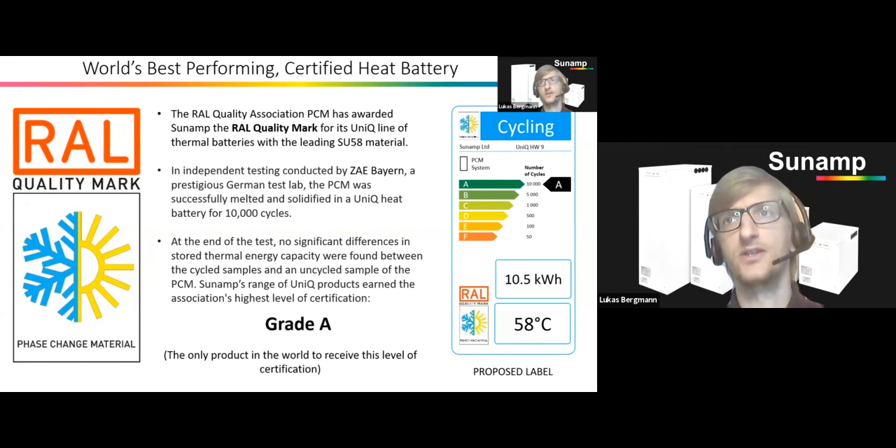Now, I want to talk a bit about why thermal batteries or heat batteries and thermal storage are going to be a key for transitioning to a decarbonized energy system in the UK, especially in the heating sector.

First of all, one of the points I want to highlight is how we are going to heat our homes in the future. The recently published 6th carbon budget of the Committee on Climate Change highlights that in their balanced net zero pathway, and actually in all other pathways they have modeled as well, a huge amount of heat pumps is going to be required to heat our homes sustainably going forward. The net balanced scenario estimates that more than 25 million homes will be heated by heat pumps by 2050.

That brings with it a lot of challenges. First of all, around the deployment of these systems, the supply chain in the UK currently is still, let's say, nascent. It brings some challenges with it in terms of costs, because heat pumps today are still significantly more expensive than the main competitor, which is a gas boiler.

But one thing that is often very little talked about is that it also brings with it some challenges regarding space, and in particular space inside homes for hot water storage purposes. And I will address this in a moment.

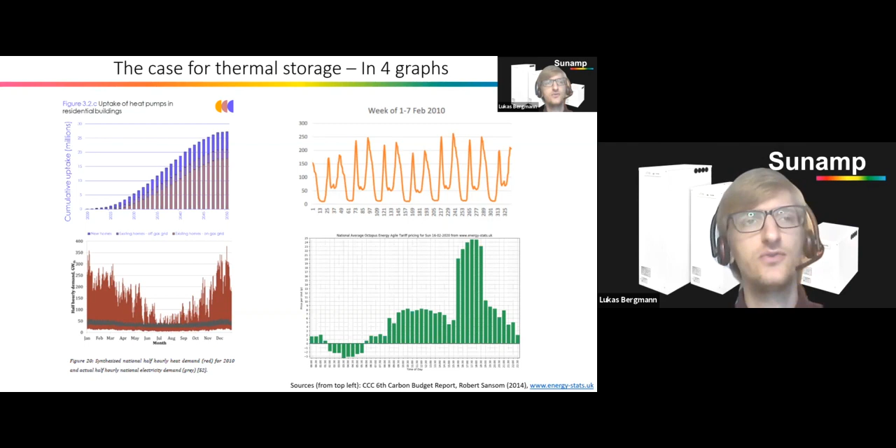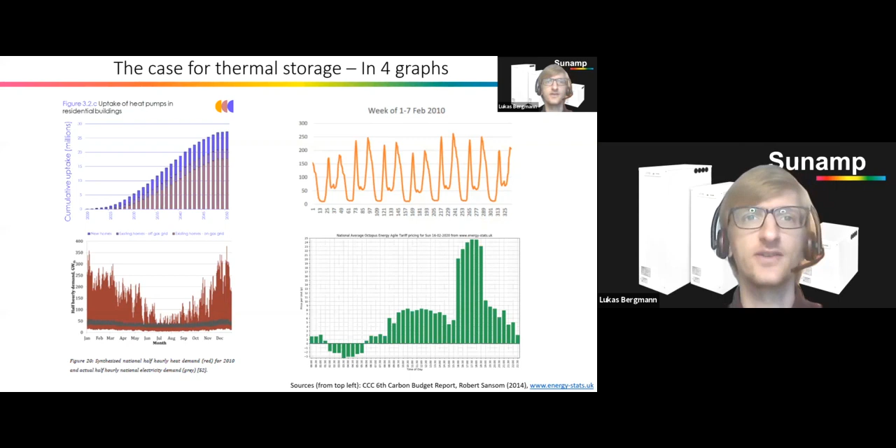And last but not least, this chart here has been used and misused quite a lot over the last 10 or so years. This is from a doctor thesis from Robert Sansom, which was published eventually, I think, in 2014, and which shows a half-hourly heat demand profile. This has very often been used to say, oh, but look at how high the energy demand is for heating, and how small the electricity supply is in comparison. And it's absolutely impossible to achieve this going forward.

But as you can see, if you look at a zoomed in version of this, these extreme spikes that you can see in the graph here, which look very solid because it's a full year in half-hourly steps, actually there's a lot of room in between them, and this is going to be an important part of what I'm going to talk about. So how do heat batteries and thermal storage come into play here?

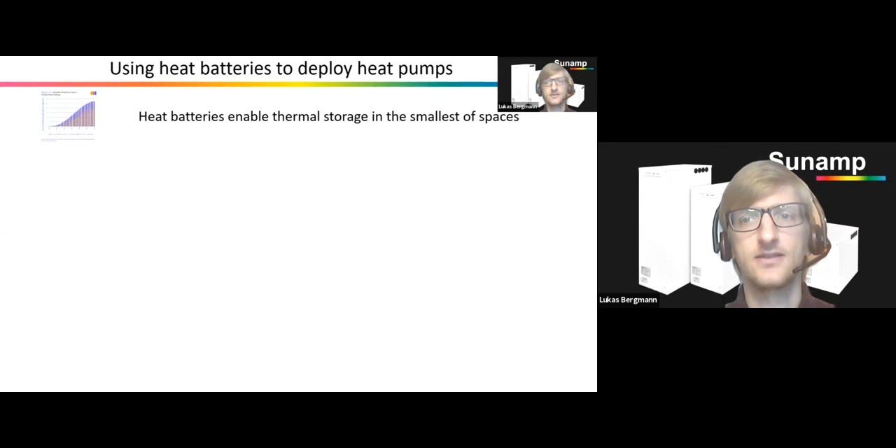One very important point to make is that heat batteries can be used to deploy heat pumps successfully in applications where previously this would have been impossible. They enable thermal storage in the smallest of spaces because of their higher energy density. And I want to use a real-life example of what that looks like.

This is a project that is not too far away from Durham. It's in Sunderland, called Core 364. If you want more information about the project, there's a very good video that explains some of the background, and you'll find a link in the presentation after this.

The Core 364 project has taken 7 tower blocks in Sunderland with a total of 364 apartments and 364 combi boilers, and removed those combi boilers from the apartments, replacing them with individual small heat pumps connected to a shared ground loop system. Prior to the installation of this new system, the towers were emitting about 600 tons of CO2 per year. There was a very high fire risk, which, due to the tragedy in Grenfell, had become extremely high on the agenda for all property owners of these types of buildings. They were also facing very high maintenance costs.

Now, what was done in this case, and really here the heat batteries were the enabling factor, was to, while all the residents were still inside the building, introduce a shared ground loop system, and then from the top of the building downwards, start removing the gas boilers and connect the flats to the ground source heat pump system.

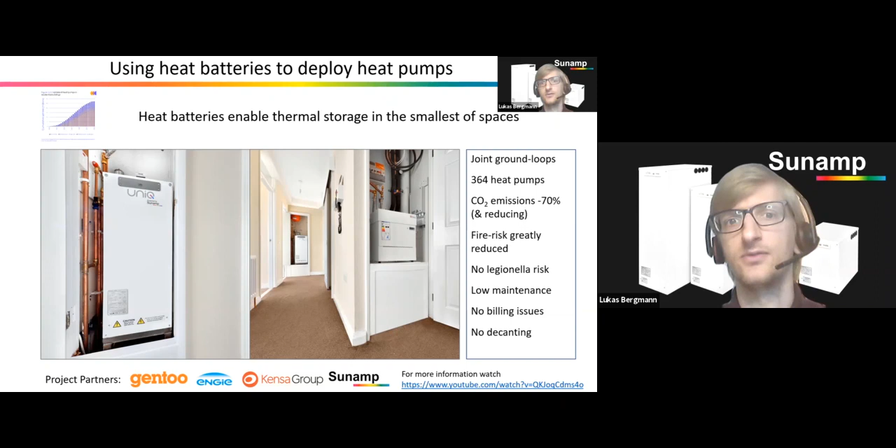Another point where heat batteries will greatly support the deployment of heat pumps going forward is that they decouple the heat demand from the heat supply. As I mentioned, in the UK we're used to delivering heating in relatively short bursts, and consumers expect a fast-reacting system that delivers heat when they want it.

The problem is that heat pumps are not very well suited to deliver this. But if you use thermal storage as an intermediary, you decouple the heat demand from the supply of heat to the heat storage. So while the heat storage can be discharged according to the customer's preferences, the heat can be supplied to the thermal storage on a continuous and regular basis, reducing cycling of the heat source and improving the performance of the system.

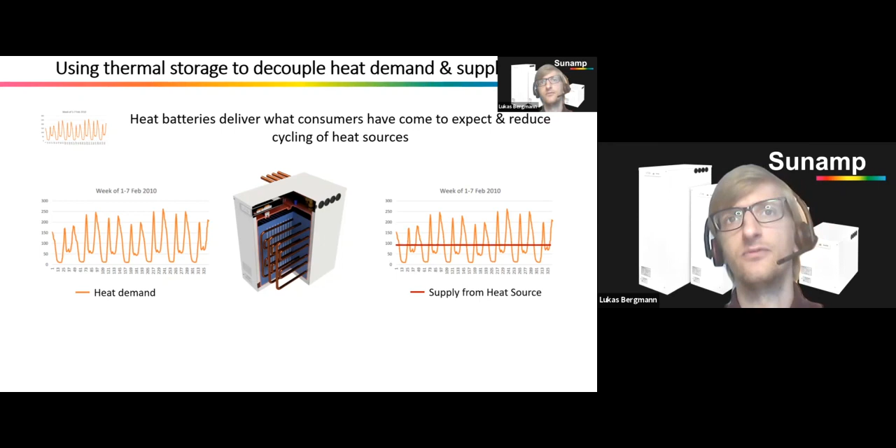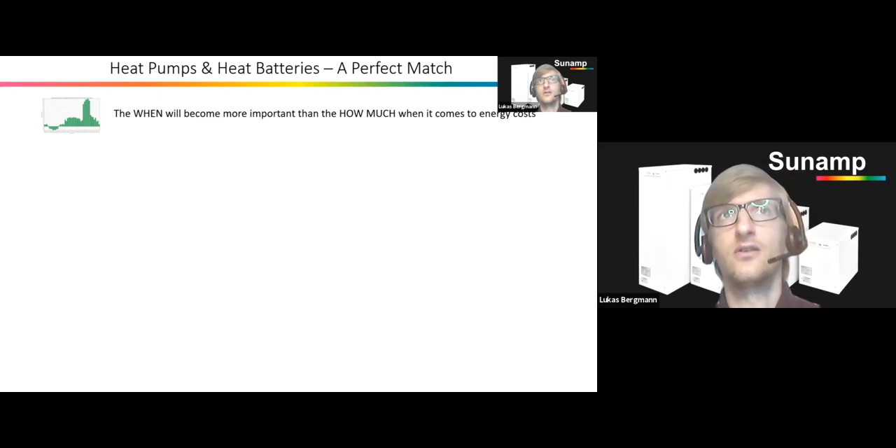Thirdly, we are rapidly moving into an energy system where the 'when' of energy use will become much more important than the 'how much' when it comes to the costs associated with that energy. The graphic I showed earlier was the cost profile, and you also see here in the top left the cost profile of the Octopus Agile tariff.

As you can see here, there's actually a period with negative costs, which means you get paid when you use energy during that time, and extremely high costs during the 4 to 7 p.m. period when the grid is at its peak usage. Enabling the use of these types of tariffs requires either an extremely high thermal mass in the building, for example by having underfloor heating in screed, as in Stephen's example, coupled with very good insulation, or it requires dedicated thermal storage to provide the same system function to the building.

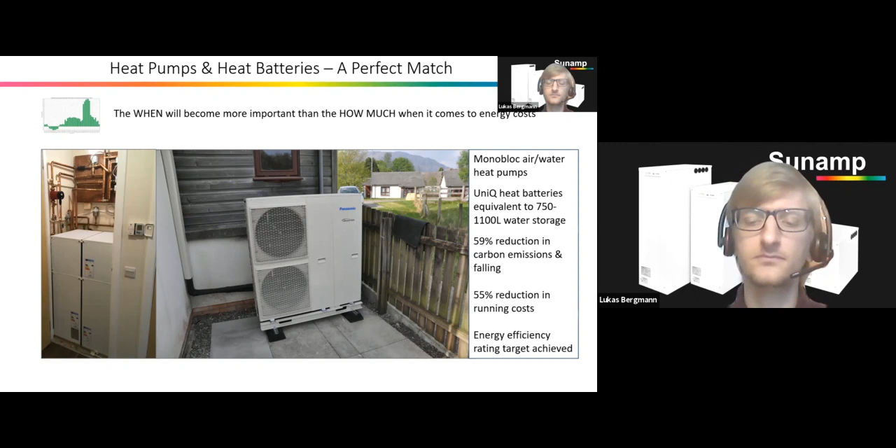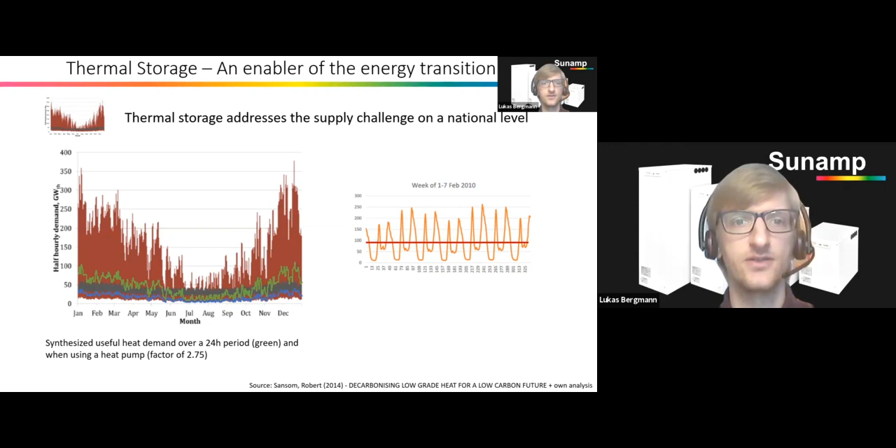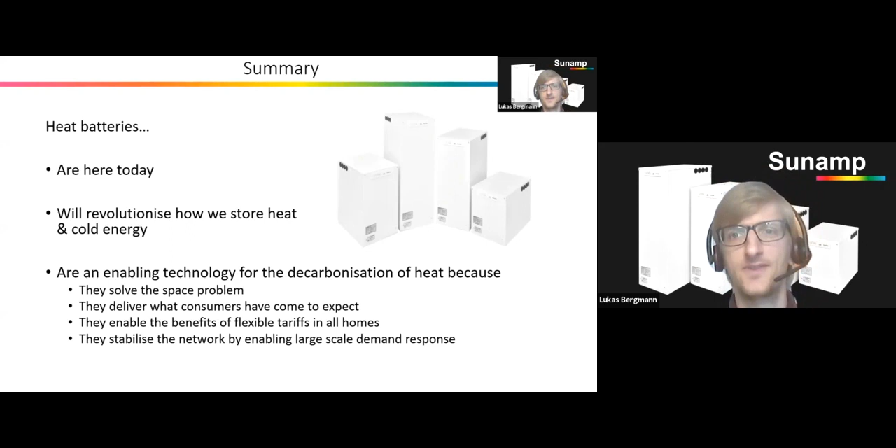So with that, I'll come to my conclusion. In summary, heat batteries are here today. They are available today for residential customers through our installer chain or installer network, and for projects through direct discussions with us. They will revolutionize how we store heat and cold energy across the globe, and they are an enabling technology for the decarbonization of heat, because they solve the space problem. They deliver what consumers have come to expect. They enable the benefits of flexible tariffs in all homes, and they stabilize the network by enabling large-scale demand response. Okay, that's me. Thanks.